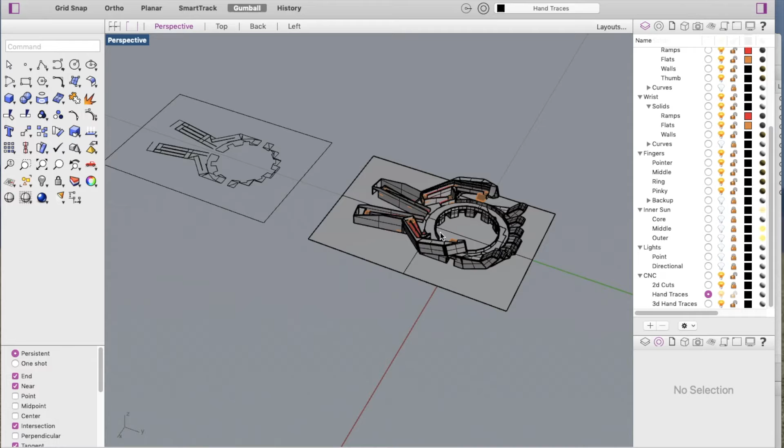Welcome to the tutorial. Last time we went over how to get set up to make a bunch of section cuts of these hands. I'll show you a 3D version of this. We're going to cut these hands up into a bunch of little slices so that we can print them out on a CNC, stack them together, and get the profile of this 3D shape.

This is a process that's often used for making representations of topography, maps, 3D maps, and contour lines, so on and so forth. But I'm using this technique to essentially prototype this set of hands here.

So going back to our top view, what we did in the last video is we got ourselves all set up. We made some layers here, and we did our first section cut of the zero plane at zero. In today's video, I'm going to go over some easy ways to get this traced out and the process of how we start essentially producing a bunch of these slices.

So what ends up happening is, like this first one, it seems pretty straightforward, but you get into a process where you're making like 40 or 50 or 100 slices or whatever it is, and there's a lot of steps to follow, and each step is crucial and has to come in a certain order in order to keep everything organized.

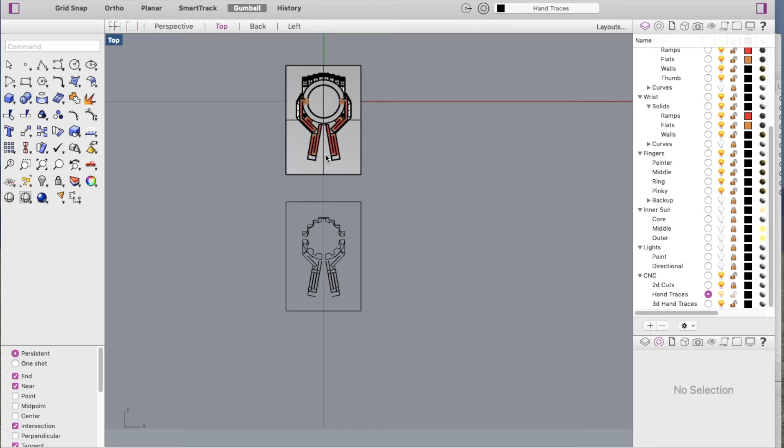Essentially the real trick is to keep all of these slices planar, even though we're moving our planes up and up and up as we slice. So anyways, let's get into it.

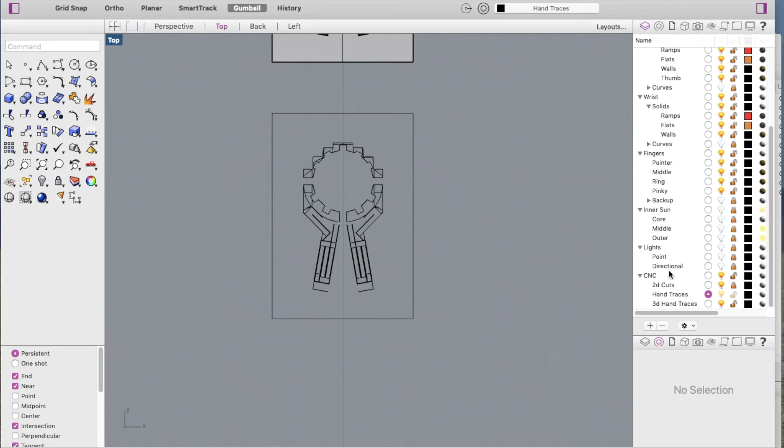The first thing you want to do is, after you make your slice, you want to make your slice on 2D cuts. This is where we're doing all of our section cutting and slicing. So once we make the slice, you want to switch off of there and go to hand traces, because that's where we're going to trace the hand. And then you want to lock the 2D cuts layer so that you can't alter it at all.

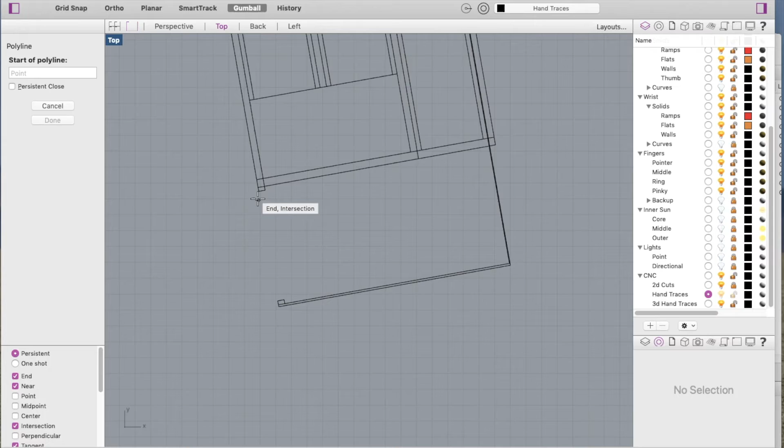Okay, and then what we want to do is come in here and make sure some of our snaps are on. Those look good. So we're going to select a polyline here, and I'm just going to start tracing from a point. Let's see here. So we go, and then this is very important.

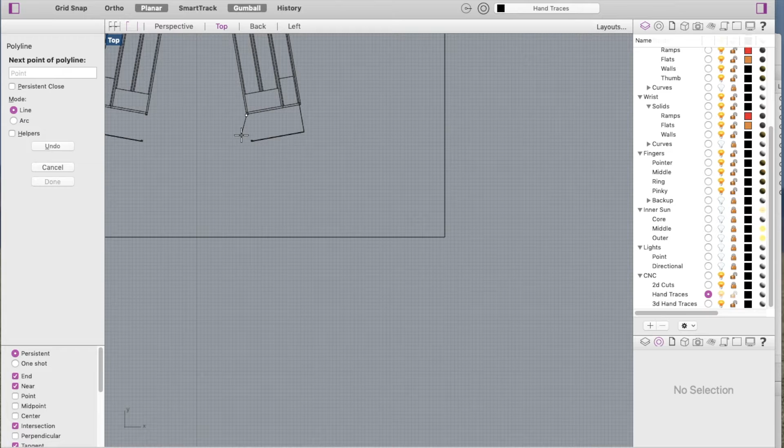We've got to make sure that these traces stay planar. And the way we're going to do that is we're going to use our planar snap for one, and for two, we're going to make sure that the section cut is always at the same level and the same plane as the plane that we're drawing on. That will ensure that you're not clicking to points that are not coplanar, and you're drawing lines or curves that are not coplanar.

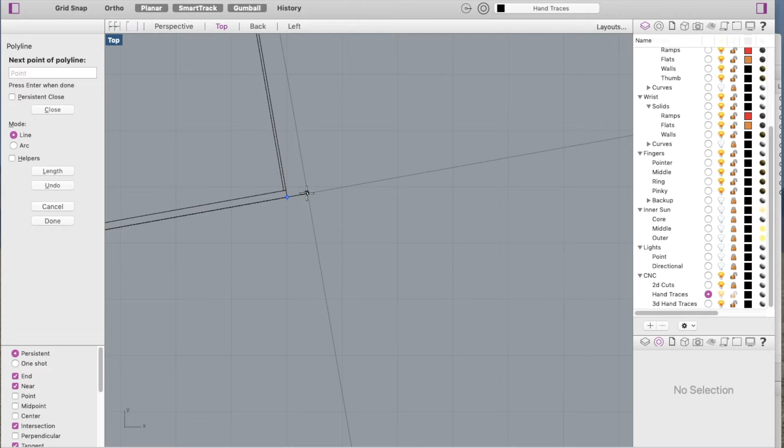So I'm just going to sort of go around like this. You can use your smart track snaps to interpolate points and intersections and so on and so forth. So we're just going to kind of come around and trace this out.

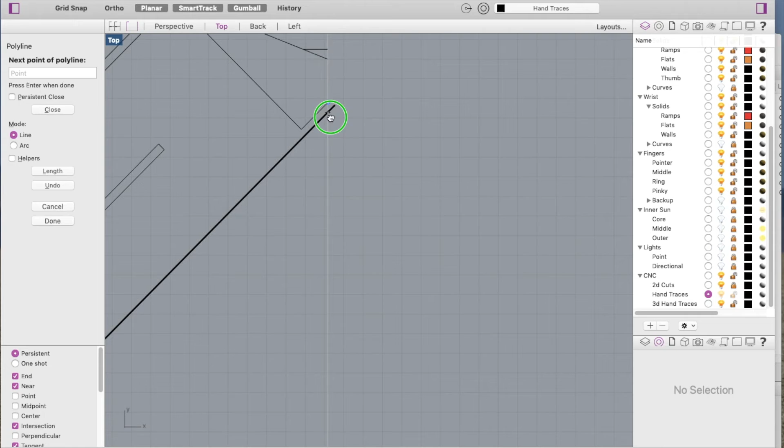I'm going to see where things are going over here. Where does this go? This goes over here. Okay, so I'm going to come to this outside line. And if you right click your mouse and hold it, you can drag around, so you don't have to zoom in and out all the time.

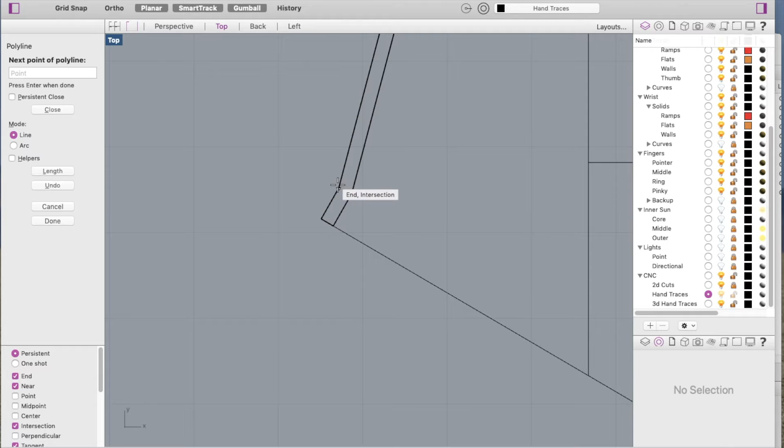So Rhino really quickly gets the idea of what you're trying to do and is great at smart snapping, what they call smart tracking. But you have to be really careful when you have curves that are really close to each other, or points that you can't necessarily see very well. It may smart track you in a dumb way, so to speak.

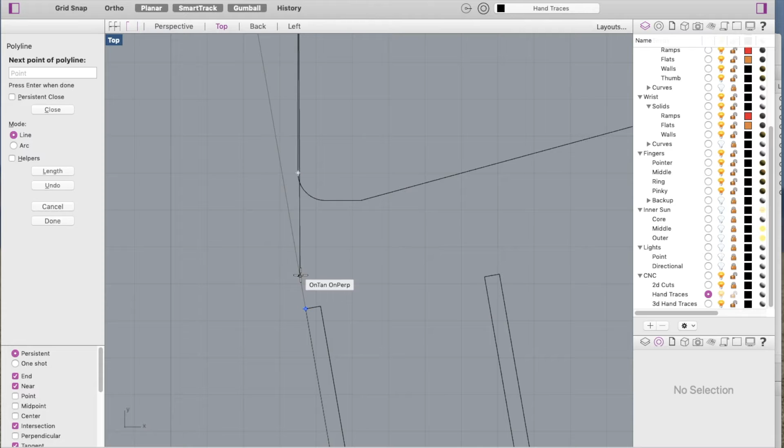So anyways, this is sort of the process. Just go around, and let's see, where do those meet? Those meet right there. So we're just about done with this, and all we got to do is come here, and now our curve has been made, and we should have one planar curve that goes all the way around here. Perfect. So that's our first trace.

Now we can come up here and do this one really quick. So let's just do it again. Do the same process here, leaving out, of course, any of these details that you do not want in your final prototype.

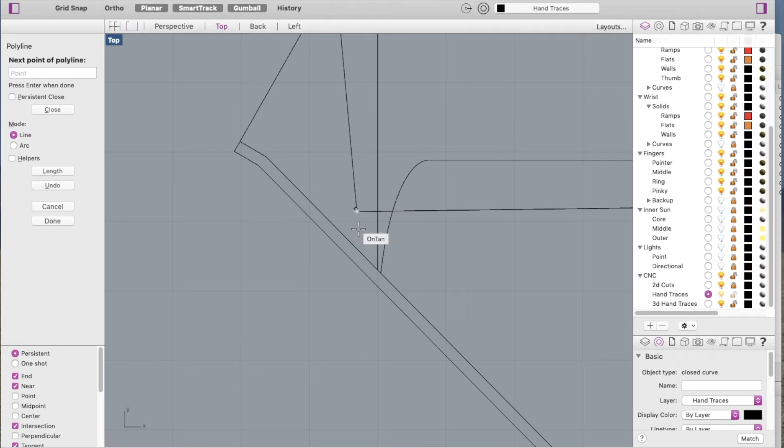This can really come in handy when you're dealing with profiles that just won't transfer at the scale that you're working in. It doesn't really make sense to include a bunch of work or parts that don't end up meaning anything.

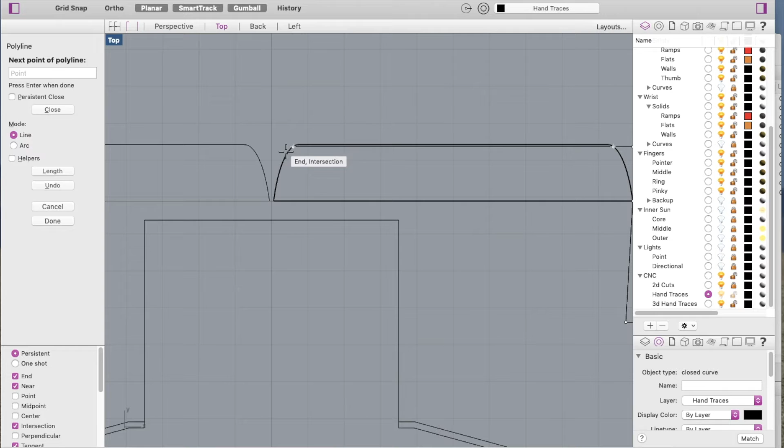So right here, we want this to end on the y-axis, and since we know that this project is centered on the y-axis, I'm going to go to grid snap. Even if it weren't, we'd be able to snap to something here that's in the middle.

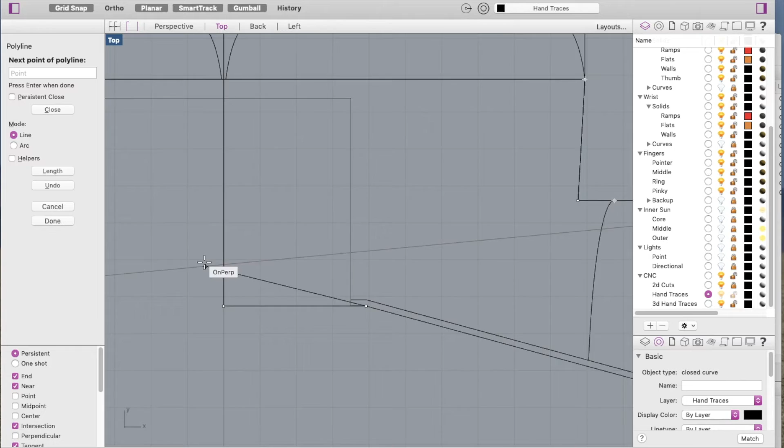This is the process, so it can be pretty monotonous, but you'll see really quickly how we're able to shorten the trace time by using previous traces. Alright, so now we've got 2 traces, right?

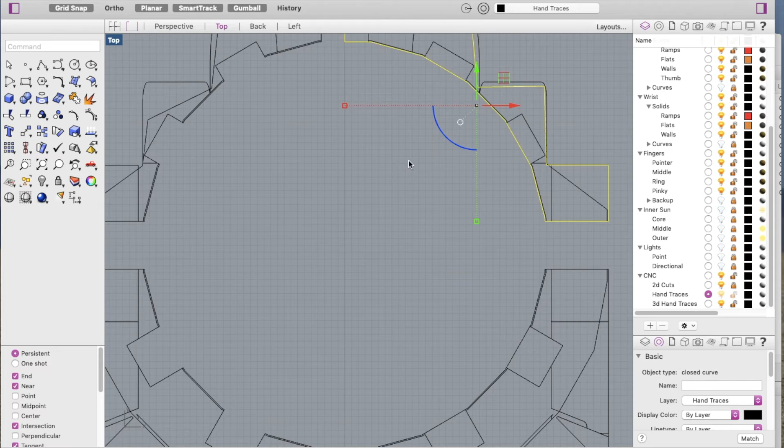That's great. So what we want to do is take these curves and trim them because I want to get rid of this. Okay, so I can't do that—let's cancel and explode that curve because that was one curve. And now we can just select this line and delete it.

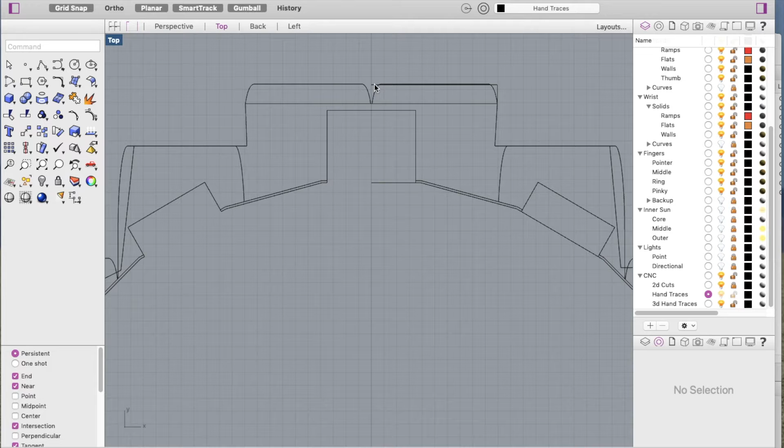The reason why I did that is because when I mirror this, I want these points to meet up, and I want there to not be a line here. I want this to be all one piece.

So what I can do now is select all of this line work here and type in mirror, and it says select the plane. I could either draw the plane with grid snap on that I know is the y-axis, or I could just press this button over here that says y-axis, and it does it for me.

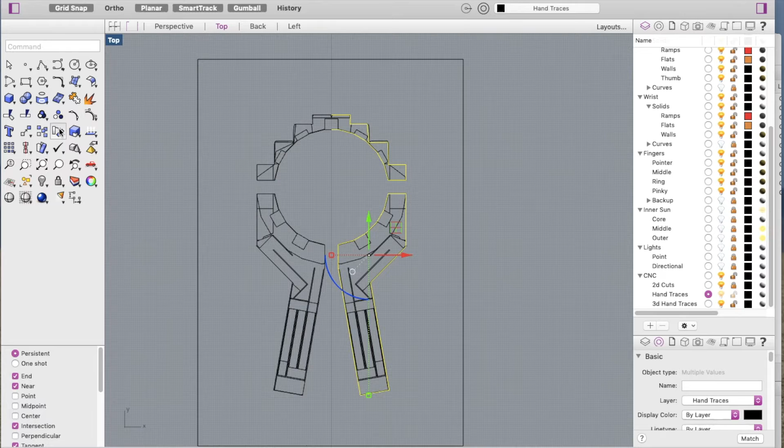And now I have, as you can see, all this line work here that's mirrored on both axes. This is great—this is the first trace level, the first bit of tracing that we wanted to do.

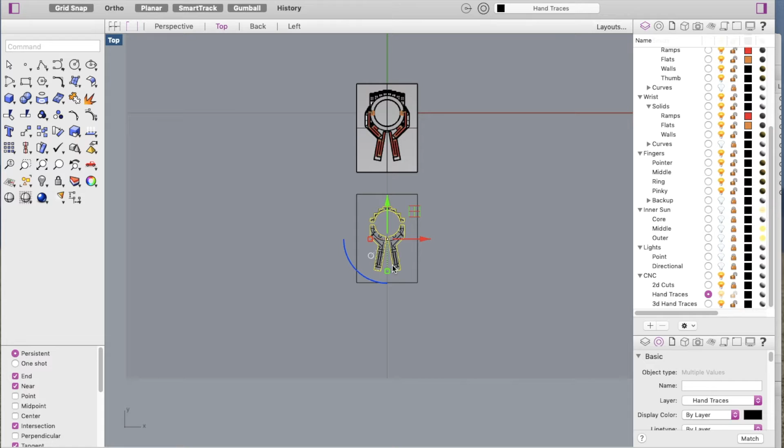So now, using the same trick that we did to move this down here, we're going to move this over. I want to copy this and move it to the left, so I'm going to hit Option or Alt and click on the arrow, and go in negative 250 feet. It just seems like the standard number I'm using, so we'll stick with that.

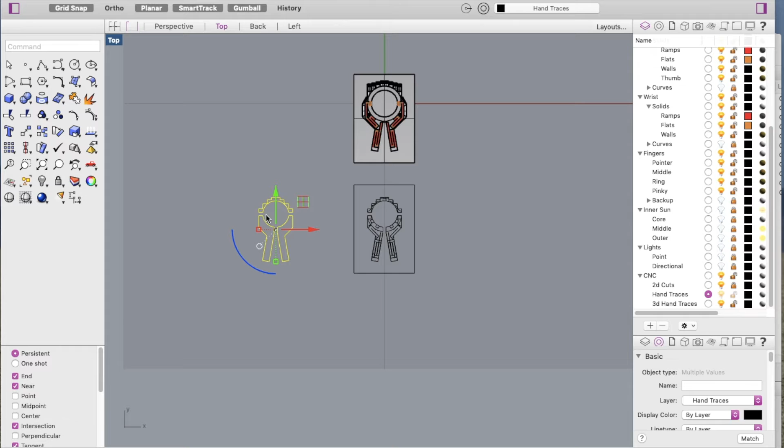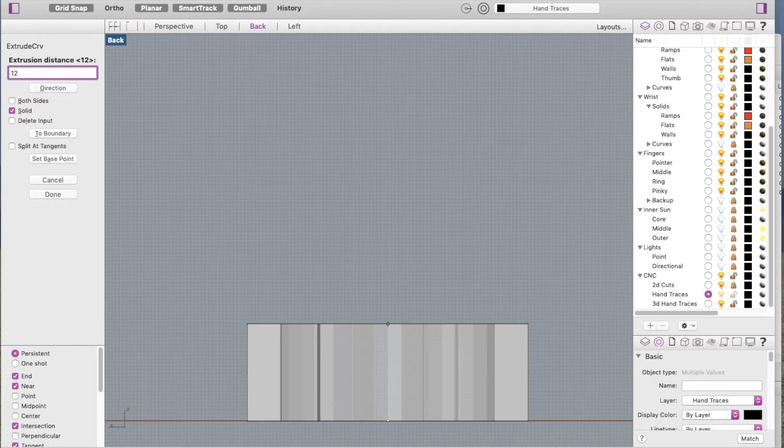Okay, great. And now this is where we're going to build our 3D extrusions. Since this is already selected, this makes it really easy for me to go to solid here and extrude planar curve straight. Now I'm extruding a planar curve, and I just need to go to a view where I can see where I'm extruding it, and I know that each one of these is going to be 12 inches. Let's talk about that really quick and how I know that.

This is a part that's up to your preference or whatever—I decided to make a cut every 1 foot in this model, and that means that every slice represents 1 foot of depth in this model. Because of that, I'm going to extrude all of these curves that I draw one foot so that I can make a representation of what these profiles are going to look like when they're stacked up.

That being said, I'm going to take this extrusion now. We can see that it's an extrusion by coming over here, and we can see that now this thing has depth. Great, we just made a solid.

So I'm going to go back to top view. I'm going to select our extrusion, and I'm going to put that on 3D hand traces, and I'm going to lock that. So now we can't do anything with that.

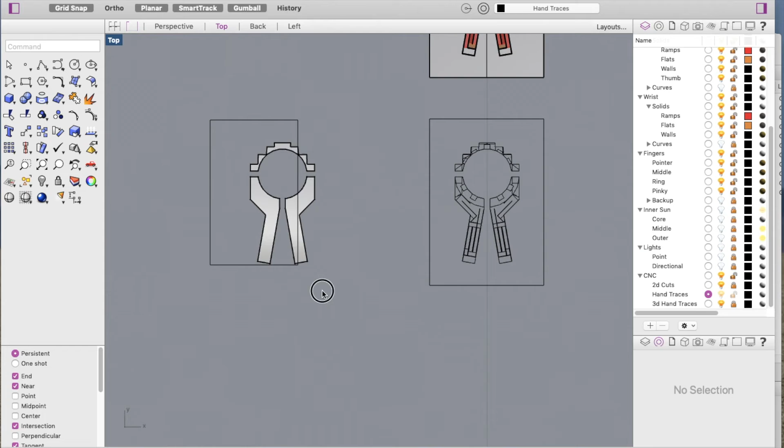Wonderful. So now I'll go over to this again, and what we want to do is take our line work and leave it here so that we get a representation of what we just drew for the next cut. But we also want to copy it over to the right here so that we can start making a stockpile of all these slices to cut.

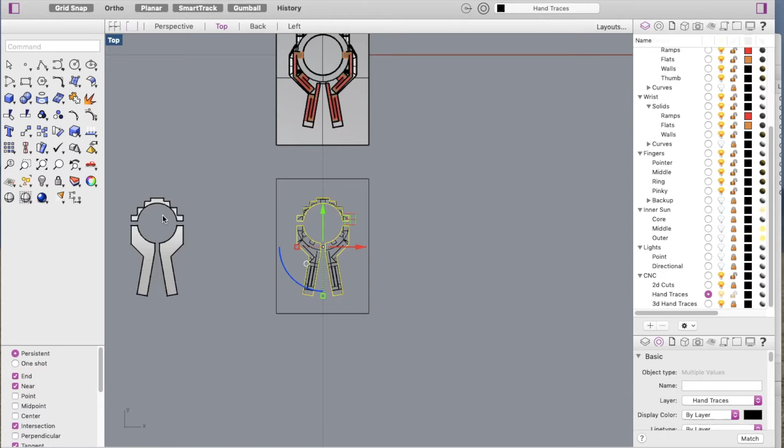So what we're going to have essentially is a big long line over here of all the slices we make in order, so that when we go to put them on sheets, we can number them easily. And over here, we're going to have a 3D representation of what all these slices look like stacked up, so that if we need to make edits or changes to the slices, we can see how we want to do that, or just get an idea of what this is going to end up looking like. So I'm going to Option or Alt click again to copy it in the other direction.

So we'll go 250 feet in that direction. Wonderful. Okay, now let's just get into this to make sure that we are doing this properly.

So once we move it over here, we want to do something called box edit. So we type in box edit, and what this does is it shows you all kinds of information about what's going on with your object. So this says we got 3 objects selected.

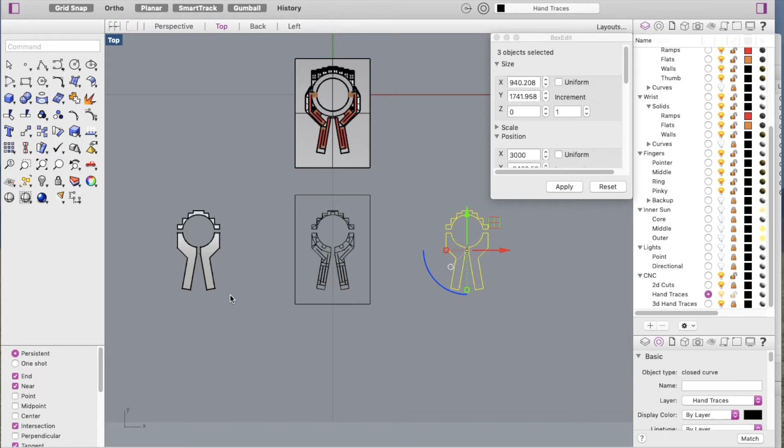Okay, that's great. So let's actually take this and let's join. Somehow they're telling me that that's one closed curve. I don't believe it. But okay, now these are all great.

So what we want to do is we want to select these, and we want to make sure that they are at 0. We want them to be all the way on the ground, because that's our plane that we're going to work in for cutting, and we want to make sure that all of our slices end up on the same plane. So in order to do that, we use this little box edit tool, which is amazing.

So the thing that is really easy to get messed up on is to adjust the size of the object here, and that is something you don't want to do, not for this process. What we want to adjust is the position of the object.

So currently we got an x of 3000, a y of negative 3422.58, and we got a z of 0. So that means that it is already flat and on the ground because z is 0. If z were not 0, we would make it 0.

So say z were 250 for whatever reason. We hit apply. The only way - if you hit enter, that's not going to do anything. And when you use box edit, I know it's kind of annoying, but it also makes sure that you're not making drastic changes to your objects on accident. So you have to hit apply.

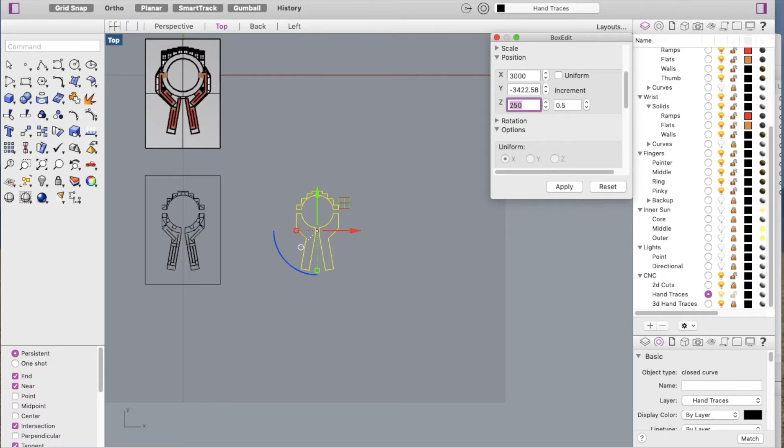So now that just moved this. If we look at back here, that just moved that up 250 inches. So now that plane is there.

Where we want it though is we want that plane to be at 0. So we're going to type in 0. It gives us a preview of where it's going down here. And we hit apply, and there we go. Now it's down there. So that's exactly what we want.

So let's go to top view, and let's execute the next stage of processes. And we'll get the full range of operations here. So okay, we got this here. That's great. It's at 0.

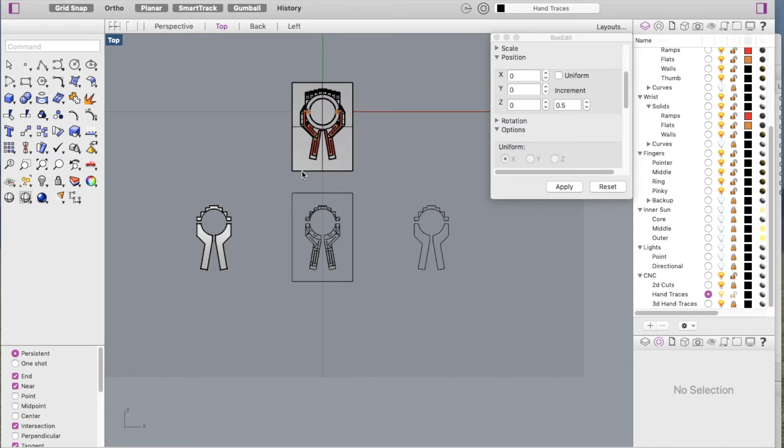Wonderful. So now we're gonna go back over here, and we're gonna select this cut that we just made. Now we want to make sure that this cut is the same level as our section cut. So we just made a cut at 0, and I know that we're going to make a cut every 12 inches. So I'm going to raise this above the z-axis by 12 inches.

So make sure we're under position here. I'm going to go over here with the object I want to move selected, and I'm going to type in 12 and hit apply. Okay, so now this is at 12 inches.

Wonderful. Now what we're going to do is we're going to get rid of this first section cut by going up to 2D cuts, which unlocks it, because that's where that cut exists. We're going to lock our hand traces so we don't erase our hand traces. And we just hit delete and see our hand traces left over.

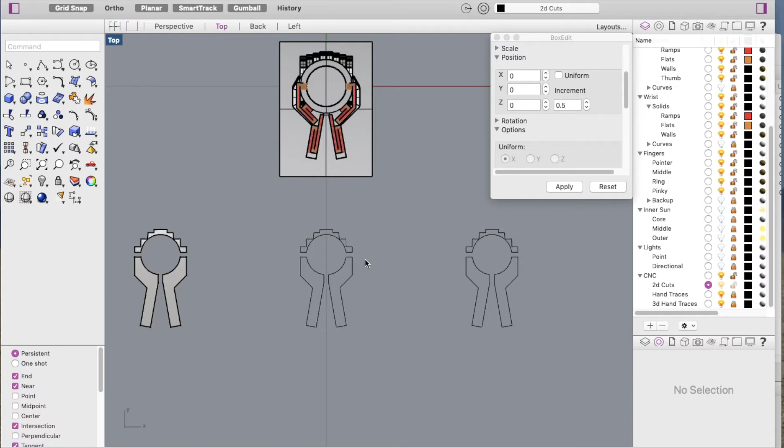Okay, so now that we deleted that, we're going to go up here and we're going to select our section cut plane, which I just did here. And we can see that that's at 0. Where we want that to be actually is at 12, because we're going to make our next cut. So we type in 12, we hit apply.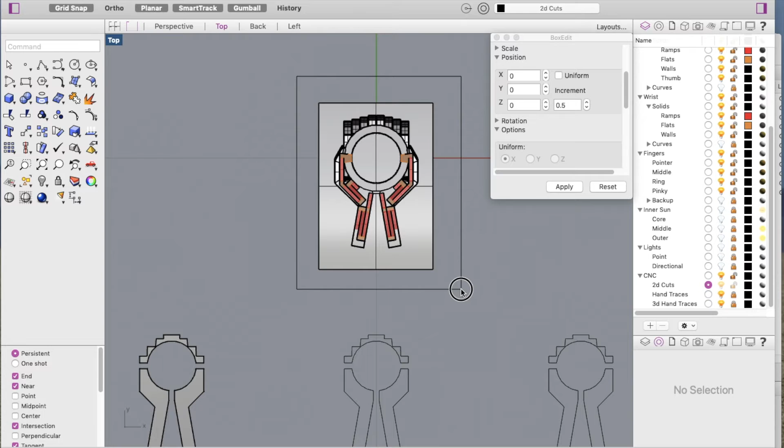Wonderful. Now let's do our section cut. So we select all of this, type in section, hit enter, and now we go to the back here, and now we can see that our section cut plane here is 1 foot higher than it used to be. So now we select that line. Wonderful. And then we hit enter, and that gives us a section cut.

And beautiful - what's so beautiful about this process is Rhino gives you a gumball that is being used for all of the objects that were just created in the section cut. And so let's move this down. We're going to do a negative 250 feet, just like before.

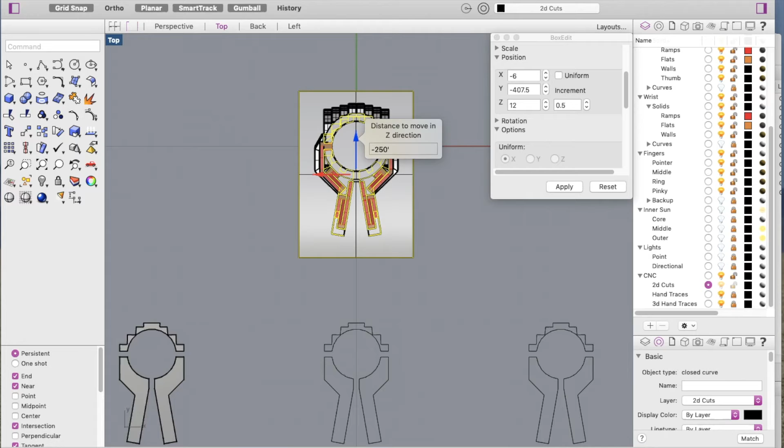And now these are in the exact same position, centered right over each other, so that we can make our adjustments and traces and everything just as we did before, but with the line work that we just made existing.

So it makes things a lot faster. At this point we want to first make sure that this is right, so we look at our box edit here, and it says 12 inches.

Great, okay, so now we switch over to hand traces. We lock the 2D cut or the section cut, and make sure our hand trace is at 12. It is, okay good. So now with our hand trace selected, we can start adjusting this trace to be more of what we want.

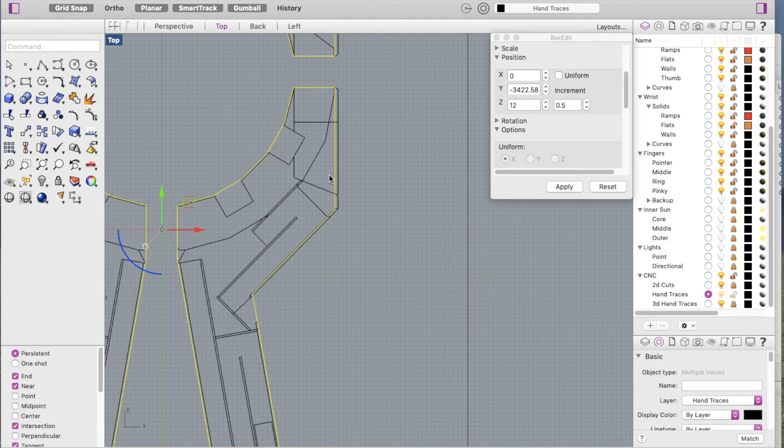I find the best way to do that is, well first of all, we know we're going to mirror this new trace over here, so let's get rid of that and delete it. Then we're going to select this, and that shows us where the previous slice was.

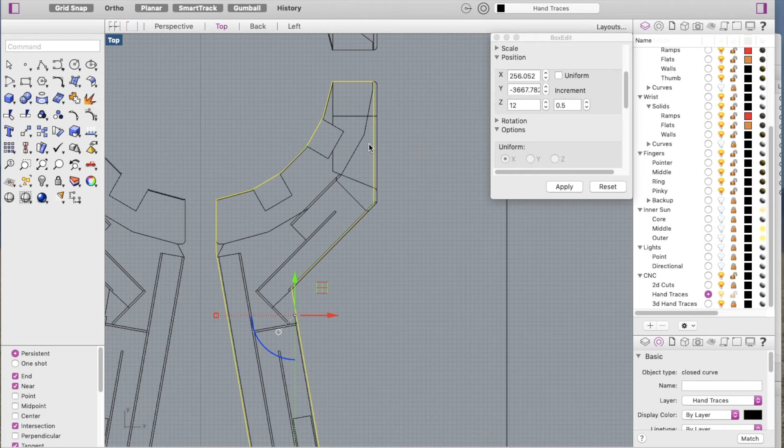With that selected, we can hit F10, and that'll turn on the control points, and we can start to manipulate the control points to make this tracing a better representation of what this new section cut shows.

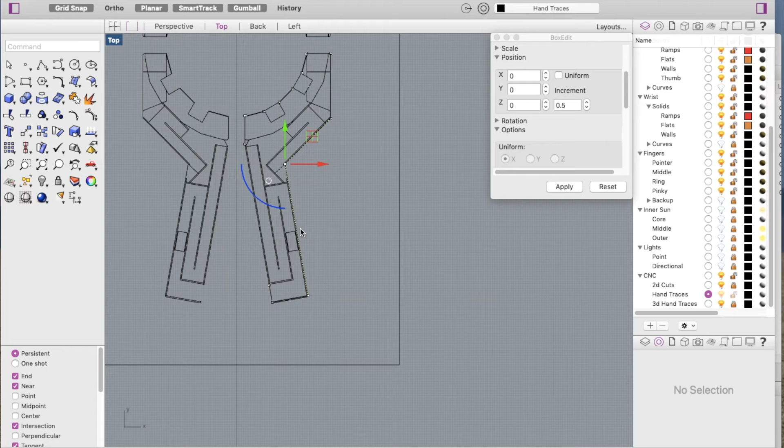And conversely, if you're not comfortable doing it this way, you can also just retrace it every time, which is, truth be told, how I did it the first time.

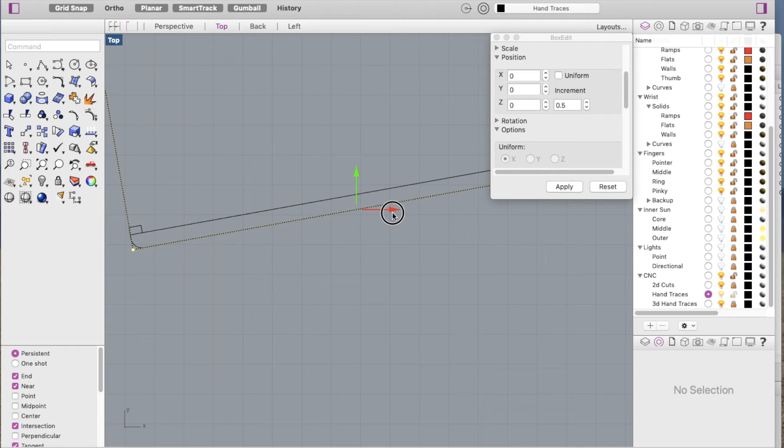The issue with this is, if everything has to be perfectly lined up, you can see this is not perfectly lined up here. So if that's crucial, you're probably going to want to use snaps, and turn grid snap off to get more accurate results without that.

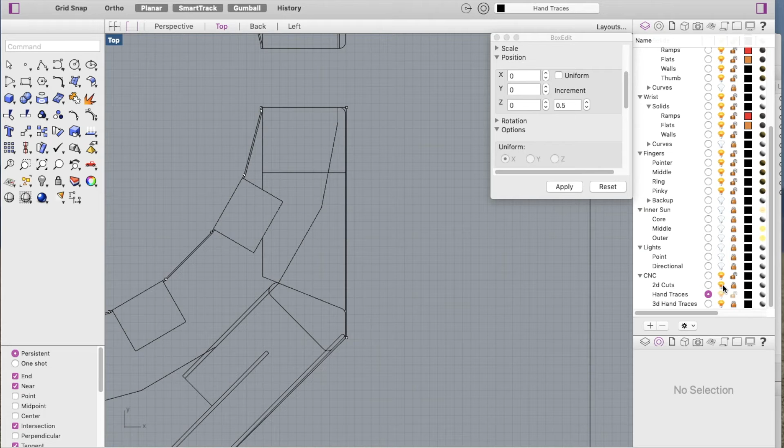Probably going to want to turn on snaps and get in here and actually trace it, draw it. But anyways, this is good enough for the work I'm doing here. We can just play with this, turn 2D cuts on and off to see if there's anything we're missing, or anything we want to include, and so on.

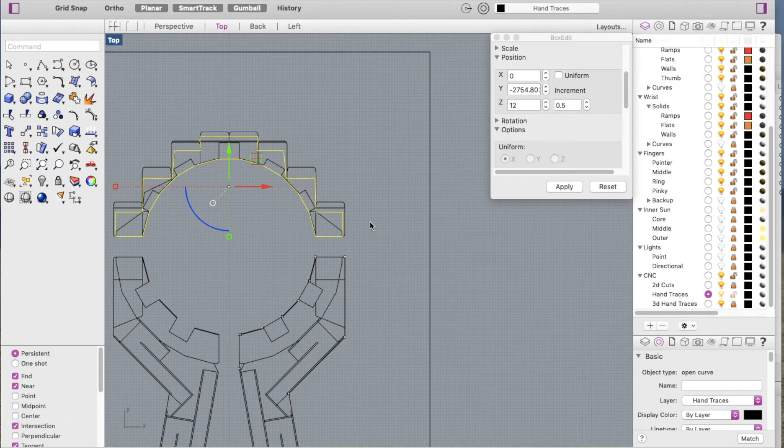So let's do that again. Okay, wonderful, I think that's good enough for that part. Now let's go up here and see what we want to change. With this highlighted, I hit F10 to show me my control points, and now I can move these around.

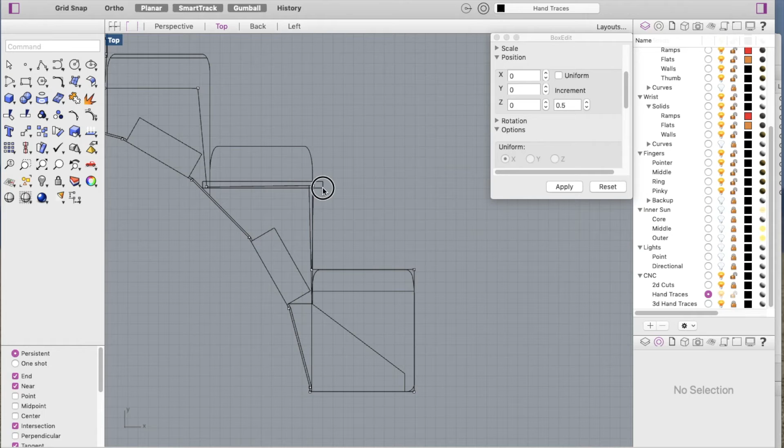So this thing wants to go this way, these ones want to go this way, and I can manipulate these as needed to get this to be a better trace of this section. This is, to me, a lot easier than going through and trying to retrace it every single time.

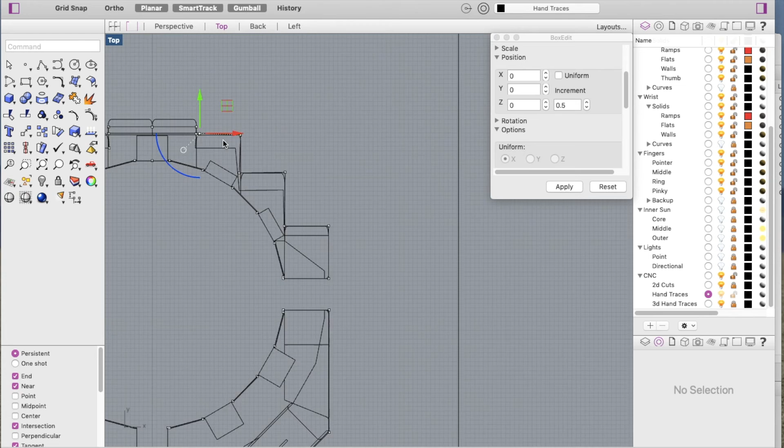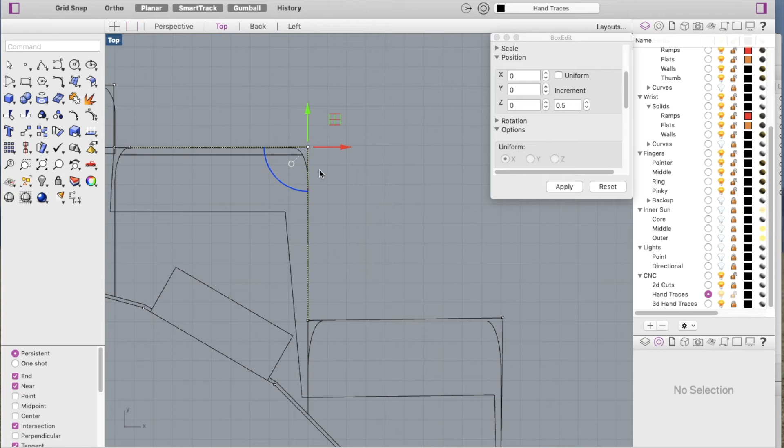To me that would be a bit much, but that's exactly how I did it the first time, so it's not out of the question, it just takes a lot more time. If you need a perfect trace, honestly the best thing to do would be to spend some time using snaps and actually retracing the drawing with snaps, like I did the first one.

Okay, so that's pretty good. We want to do something here and attach a line from here to here, I'll show you why in a sec. Then what we want to do is turn these control points off, so go edit, control points off.

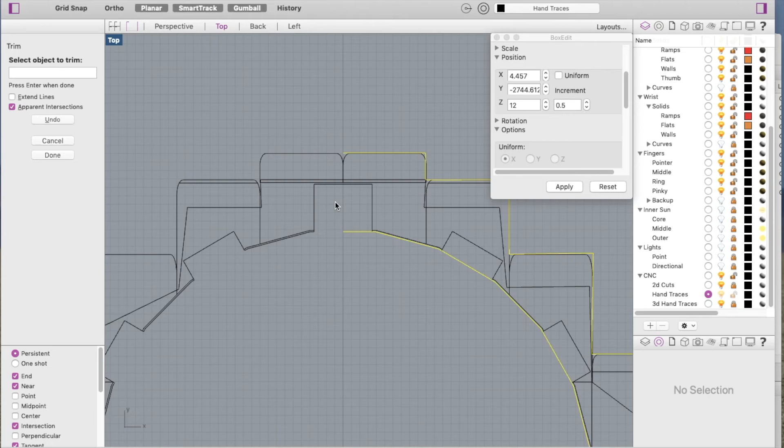Then I'm going to select everything up here and trim, because I want to get rid of all this business. Okay, all of that is gone, and then I also want to get rid of that line just like before, and we select done, and then take all this business here and mirror it again.

Mirror, enter. Okay great, and we want the y-axis once again, so there we got all of our stuff mirrored. Select everything, join it together, and then there's our next slice.

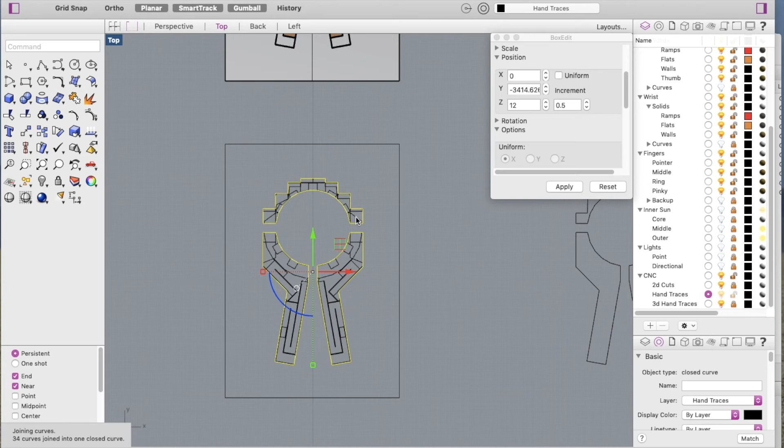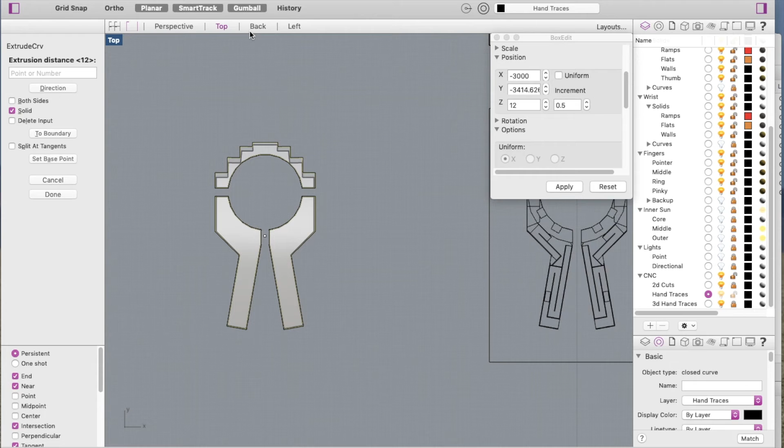So what we want to do is take this slice and Alt or Option click, going negative 250 feet, so we get over here, which is exactly what we want. Then we're going to extrude this, a planar curve because that's what we have here. Go to our back view so we know which way we're extruding. We want that to be 12 inches as we discussed before.

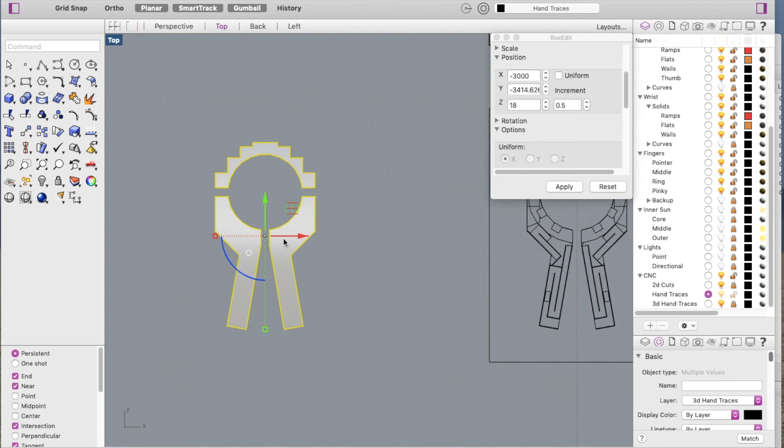Go back to top view, select everything, and make sure it's on the 3D hand traces layer. If you're planning to manipulate this later, I suggest grouping it before putting it on the hand trace layer. That way each layer, each extruded slice, is a group that can be manipulated. Otherwise you have to grab all these pieces, and eventually there's quite a few things going on here.

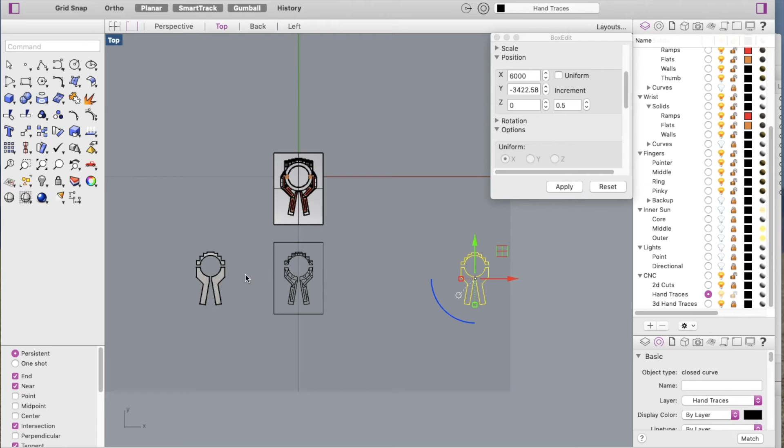So that is wonderful. Now we want to go here and select this, okay, and we're on 12, okay wonderful. So what we want to do is move this over 250 feet. It's important to keep this the same every time so that you can easily manipulate these pieces and get them to stack up perfectly on top of each other. If you don't use the same numbers every time, lining them up is extremely difficult and is guaranteed to produce errors. Okay, so now that we have that, we can move this over.

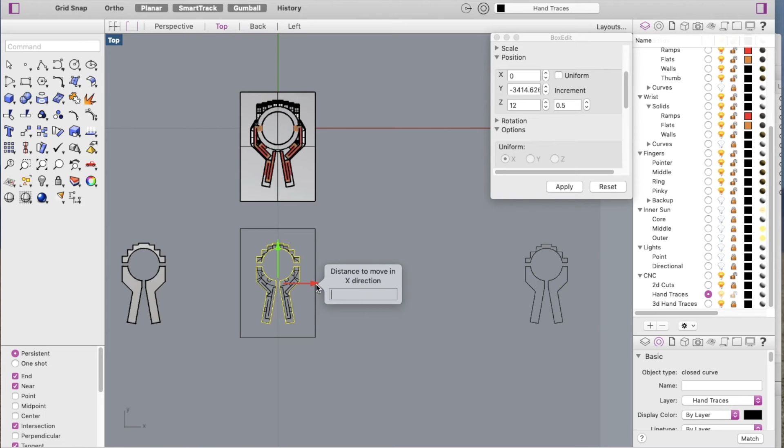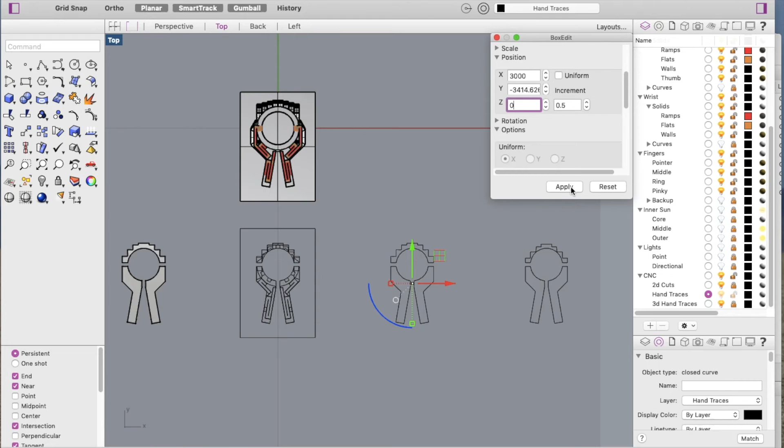Again, we're going to Option or Alt click, and then we're going to move it 250 feet in that direction. And this is where you start to see, okay, now we have this selected, it's already selected, and we can look at the box edit and see it's 12 inches. We want this to be at 0 here. We want all of these things, everything right of this, to be at 0. So we're going to type in 0, hit apply. Okay, and there's our next slice.

Wonderful, so let's just go through this one more time. We're going to move this up again, so now it's going to go up to 24. Apply. So now that's at 24, great, and we're going to go back to 2D cuts.

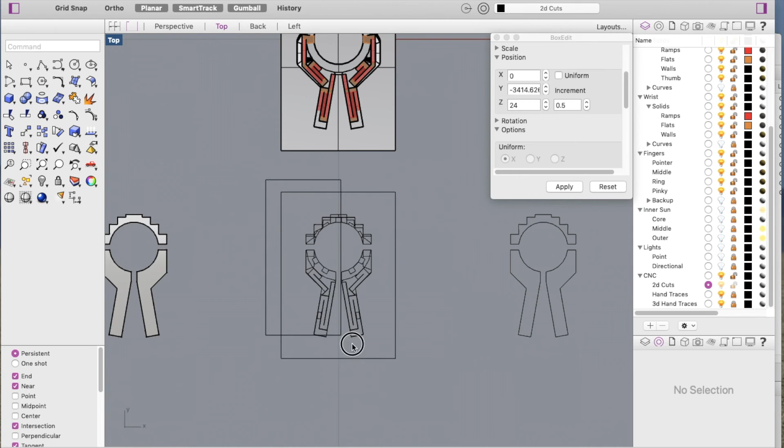We're going to lock our hand trace. We're going to select this 2D cut and delete it, so we're left with our hand trace. And we're going to go over here to our cut plane and move that up 12 inches, so now it's at 24. Apply.

If you don't want to do it this way, you can also just come over here with your cut plane selected and use the gumball to move it 12 inches up, or however much you want to move it. Just click the gumball, type in 12, and enter, and that'll move it up 12 again. I'm going to undo that though, because we don't want it up that high yet. Okay, so we're at 24.

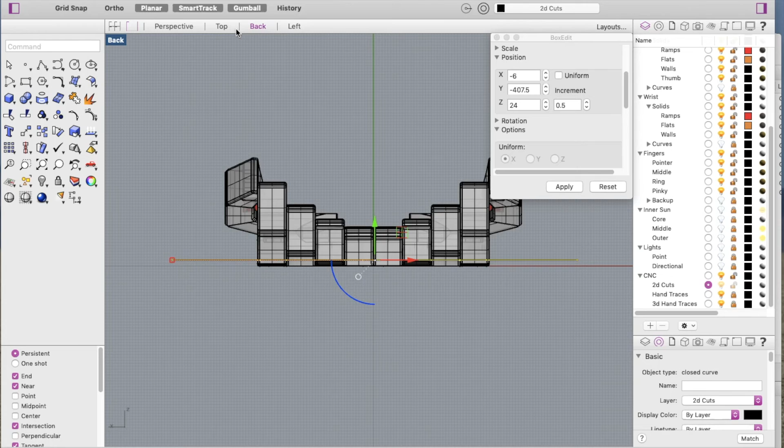Good, so we come to top view here. Let's select everything and type in section. Go back to back view, and it's going to ask us where we want that, and we want it right there. That's great, and we hit enter to give us our section, then we move our section down. We're going to click the gumball, negative 250 feet, press enter. Okay good, and then so we're at 24. Just going to keep checking this. So we're at 24, wonderful.

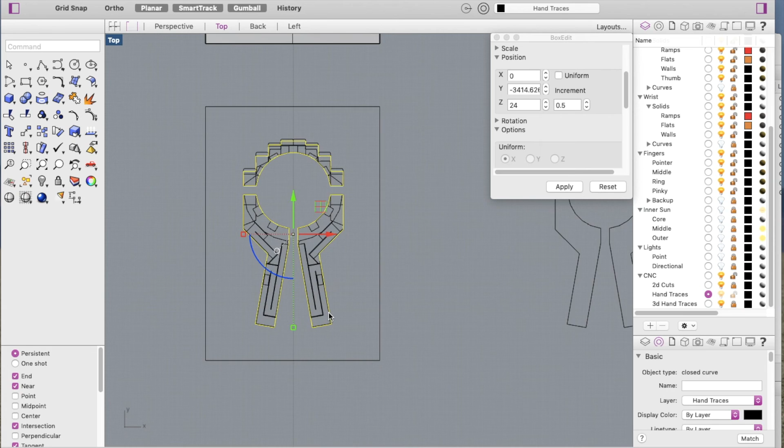Now I'm going to deselect that. I'm going to go back to hand traces, lock the 2D cut layer, select this. This is our hand trace. Okay, now we're ready to modify this if we need to. So what am I going to do?

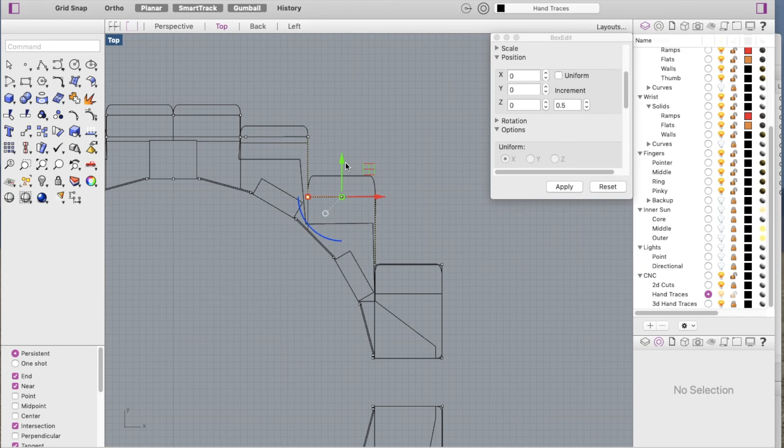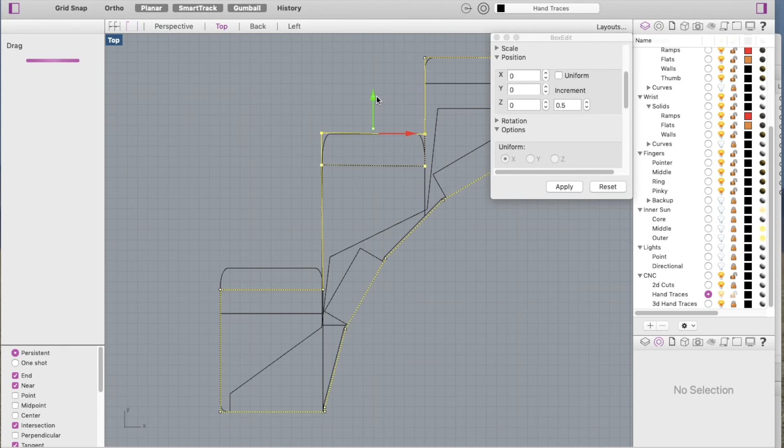I'm going to turn control points on by pressing F10, and then move these just like before. I don't really care that much how nice this is because I've already done this before, and this is just for demonstration purposes. So I will just go through and do this just like this. Maybe it's just as fast to do this right here instead of all that other business. Some of these traces are going to be faster, some slower. It just depends on the detail you're working with, the detail you want to carry over, how patient you are, and so on and so forth. How picky the client is, whatever it may be.

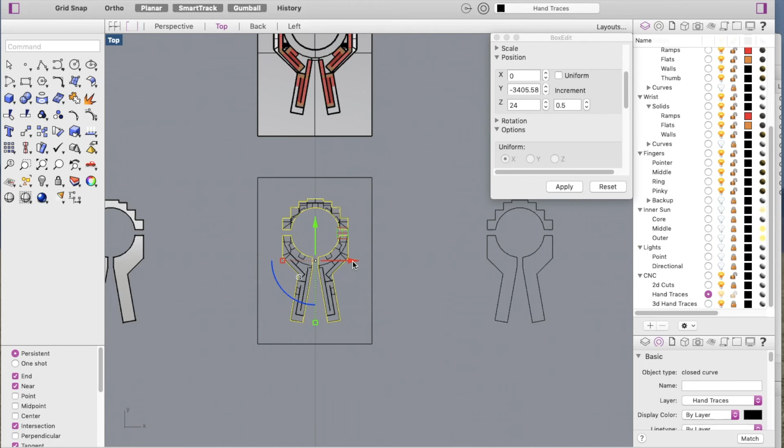All right, so now we're going to turn those control points off. And wonderful, we already have our next slice. So we just select this whole thing. We're going to hit Option or Alt, and go negative 250 feet. Wonderful, and then we're going to extrude that just like before. Extrude planar curve straight, and we're going to go back and say go up 12 inches. Done.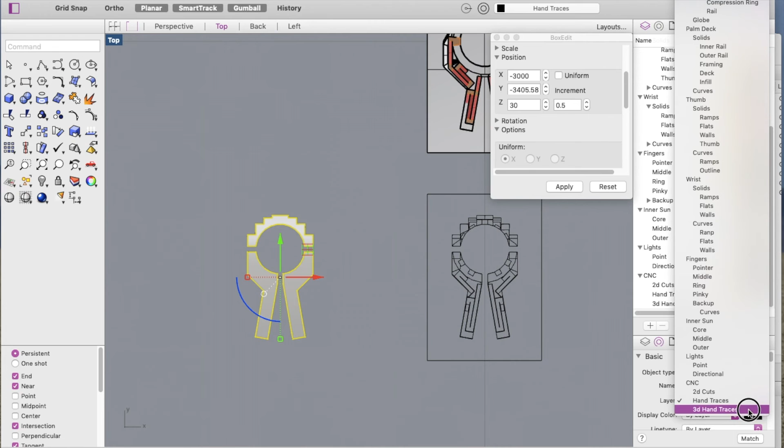Then we go to the top view, select all this, move it to 3D hand traces, and now we can't select anything over here, and we're going to move this stuff over. It's important to keep these in order too. So we got 1, 2, this will be 3. So let's see what we're going to do.

We're going to just move this over 250 feet. And then we're going to select this, and copy it over by pressing Option, click, 250 feet again. Okay, now this is a really important part. See, we're at 24 on our Z. We want this Z to be 0.

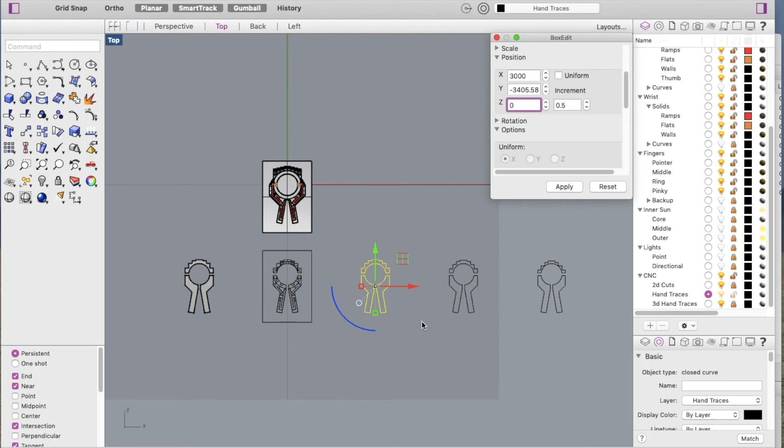Apply. There we go. Now if we select all these, they should all say 0. If one of them is off, then this number will be a weird number—it won't be 12 or 24, 36 or whatever, it'll be some average of however high all of these are. For example, if we unlock 3D hand traces and select this, 18 is the current height.

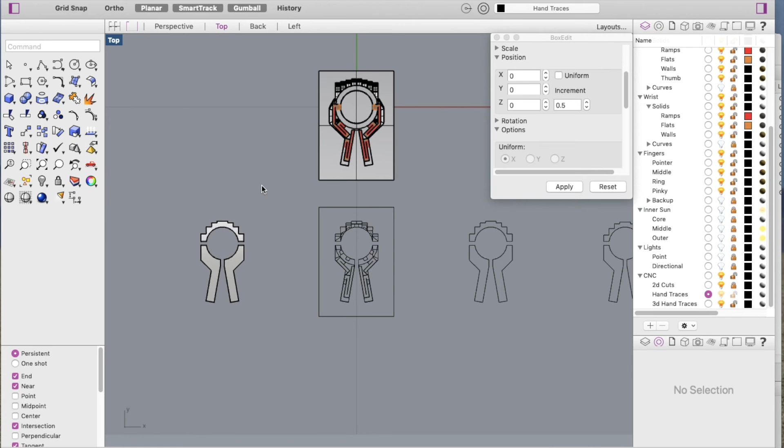So that's what we got there. Let's go to perspective and maybe you can see what's happening with these profiles. See, they start to stack up like this, and they start to create a representation of the model that we're attempting to prototype.

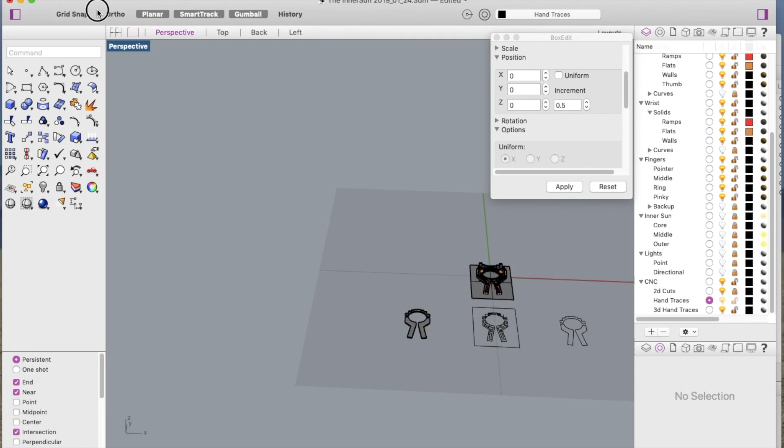So what I'd say next is I want to show you what the finished product looks like. Let's click this screen—this is the finished product. We'll get rid of box edit. This is all of the layers stacked up, all of them sliced and stacked up.

So let's go—you can see that my cut plane here is at the very top, at the very top of the thumbs. I moved it up in increments of 1 foot all the way up through here, and this is the very last cut, as you can see. And if we go to top view, look—here's the very last profile, the very last one I made.

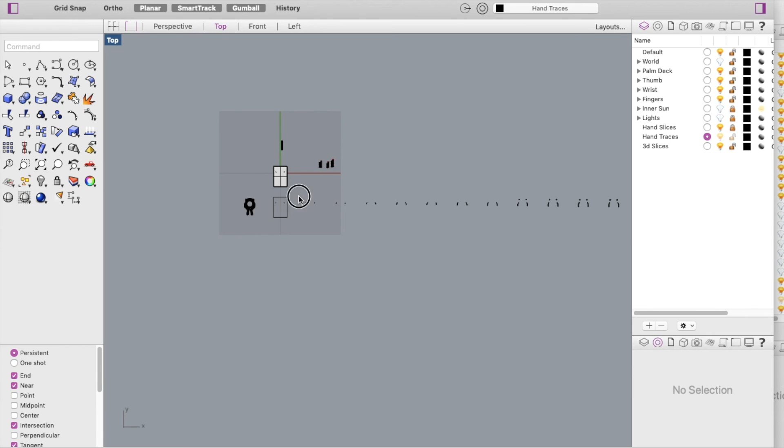I moved it—I need to move it over here actually still, so it's good that I came here, because I need to finish that last trace, that very last trace. See, those parts would have never got cut.

So what I'm going to do is select all of this, and you get to see how fun this is—see how many slices I actually got here. There's all those, and then I'll shift-select to add these. I'm just going to move everything over.

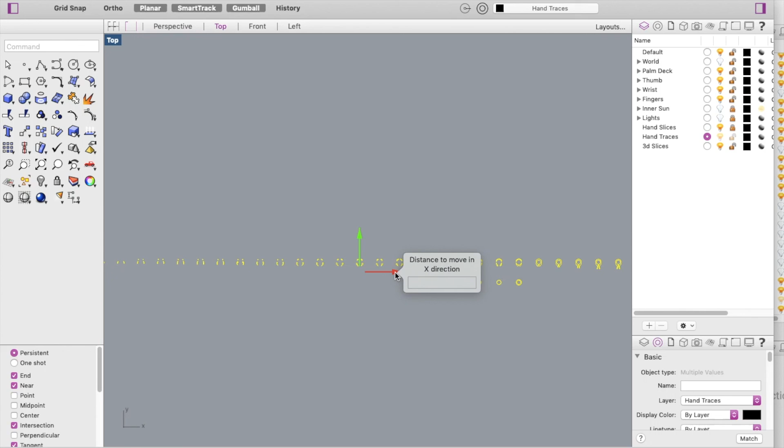In this model I used 300 feet instead of 250, so that's what I'll do—I'll move that 300 feet over, come to here, select this, Option-copy, and go over 300 feet, and then I'm going to type in box edit.

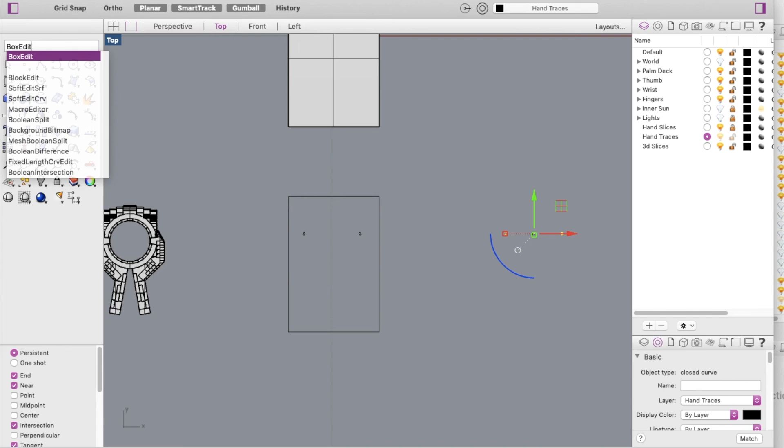Make sure that I'm at 0. See, when you type in box edit, it first comes up on the scale area—don't mess with this unless you know that you want to. What I would mess with is this right here: 432, that was the last slice. We started at 12, and we got up to 432. So divide 432 by 12, that's how many slices I made. I actually made one extra for a ground plane, but that's not really important.

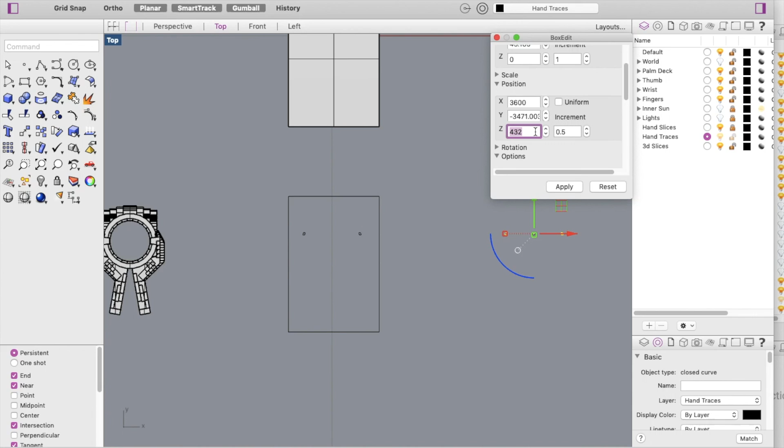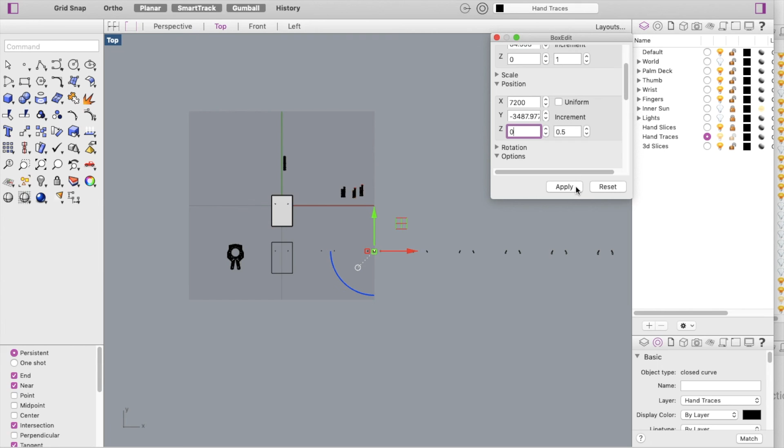So what we want this to be is 0. Apply, ta-da, and now all of this stuff should be at 0. Oh, it's not—so let's see where we have a problem. One of these is not at 0, this one is not at 0. It's at 432, so what we want to do is make it 0. Apply. Okay, great, so now it's at 0.

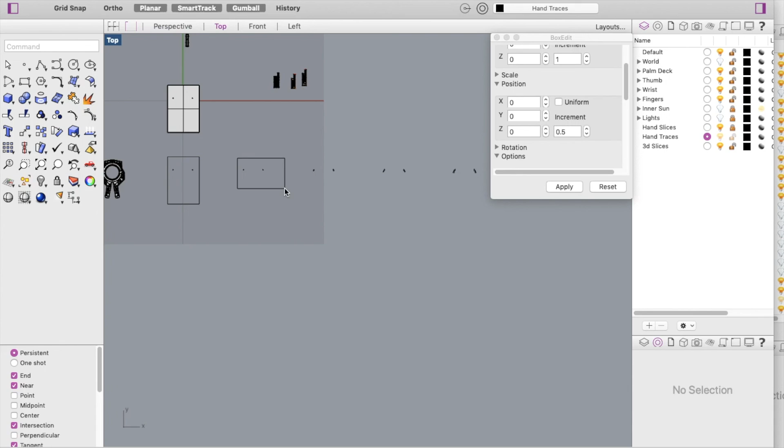And we can just keep doing this if we wanted to. How about I just move that? Zero, yes, okay. So that's what I mean by it's really important to check, because once you get into the process of doing this, you go pretty fast, and if you forget one of these steps, it sort of messes everything up.

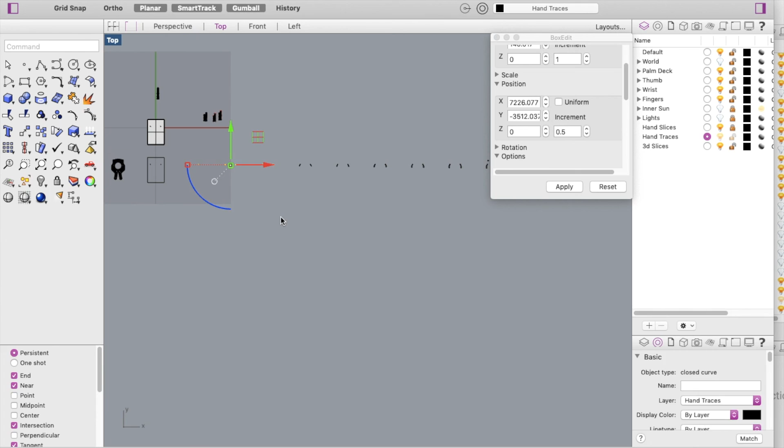But if we wanted to, we could select all this stuff here, and it says 0—wonderful, and we already know that we just made these ones 0. So I'm going to check, just in case, because it never hurts to check. Wonderful, so that's what we got. Then I'll come over here and select this plane and delete it, and we can see that their hands are still there.